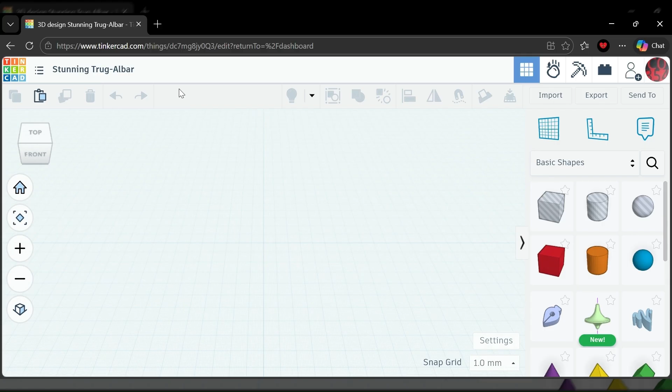So we're just going to go to create, and we're using the web browser version of Tinkercad. We're going to name this vertical spinner bot.

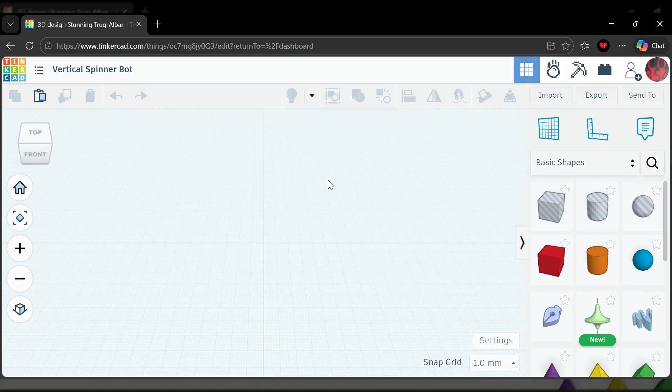The 5 main category bots are vertical spinners, horizontal spinners, drum spinners, full body spinners, and flipper bots. Flipper bots are not really used because it is very hard to make an automatic flipper bot.

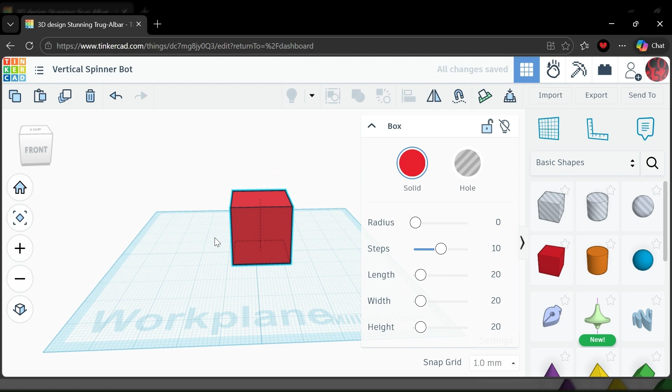The first thing you really need, and this goes for any great version of a bot, is a good solid flat base, especially for vertical, and you want it in a kind of square slash rectangle base. Give it a good solid foundation. Also, unless it's a small body, 4 wheels is best, and today we are going to go with a 4 wheel design.

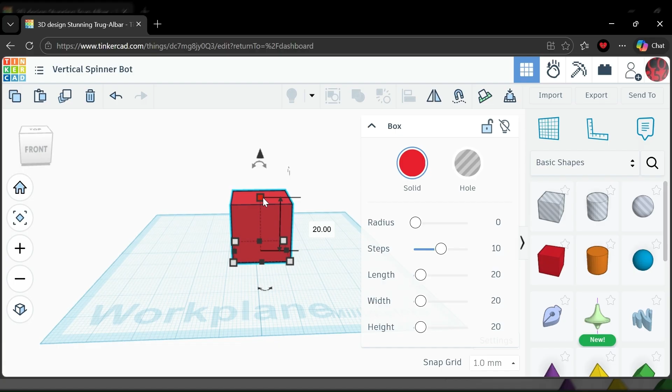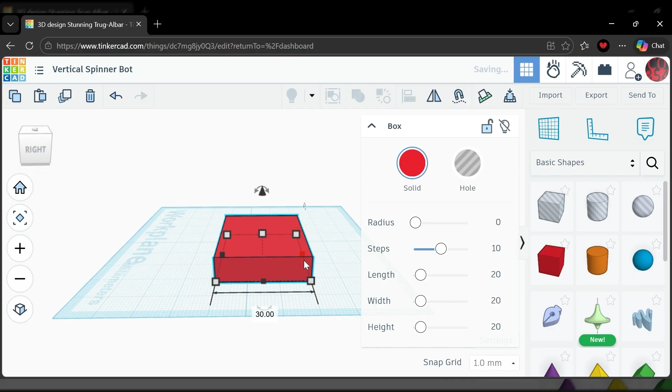So we're going to take the box shape and shrink it down to about 8. Stays good for now. Then we're going to make this about 40 wide by 30. That is a pretty good solid base.

We're not going to worry too much about design right now. This is just a tutorial of the basics.

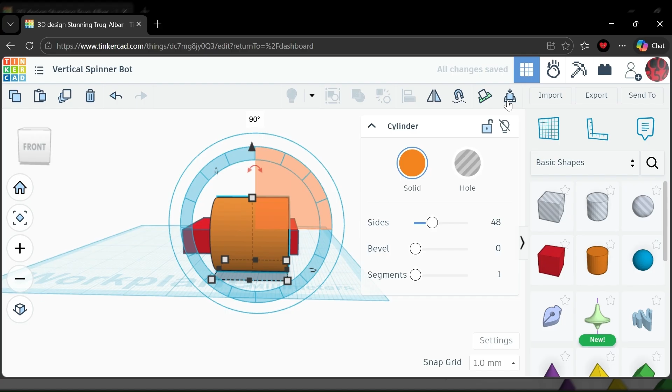For the wheels, you can take your cylinder shape, drag it out here, turn it sideways, and this tool drops it to the floor of the work area. Then change the sides from 48 to 128, and that makes it smooth and makes it grip very well. Then we can change the size of it to 10.

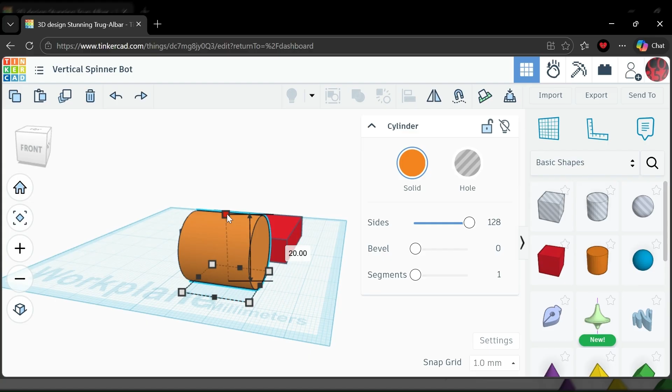Actually, we can undo. The cool trick you can do is, if you're using a keyboard and mouse, which is what I'm doing on my laptop, hold the shift button, click on the anchor, and you can shrink it to about size 10 all around, so it shrinks universally.

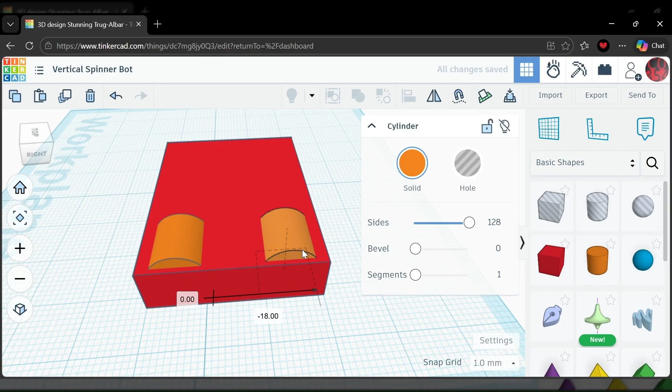Then we're going to bring it over, I'm going to put it about the corner here. Then we're going to duplicate this and move it to the back corner here. We can shift-click to select both of them. Not exactly what I wanted, but that works.

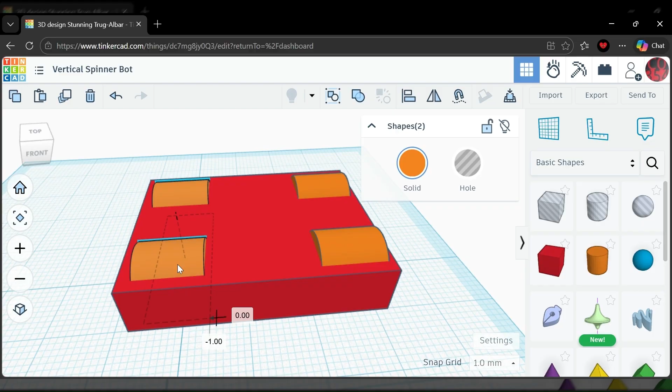You want your tires to have a good equal spread. If it's lopsided, then it's not going to work that well. Then what we can do is pick up the body, that way it's not dragging on the ground.

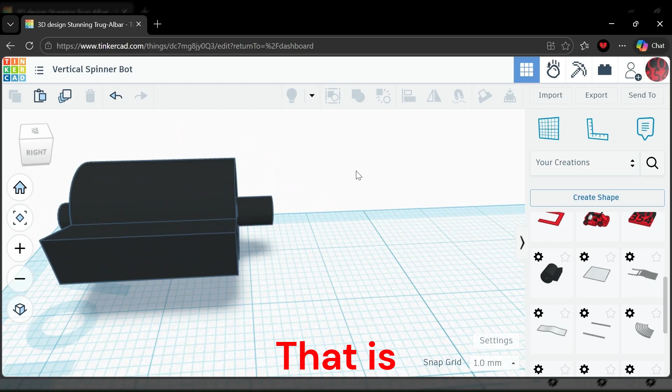A lot of people get drum spinners and vertical spinners mixed up because they both spin in a vertical direction, but a drum spinner is almost a cylindrical shape. It's round in shape, and it's also very wide for more contact area. It's more for chewing into your opponents.

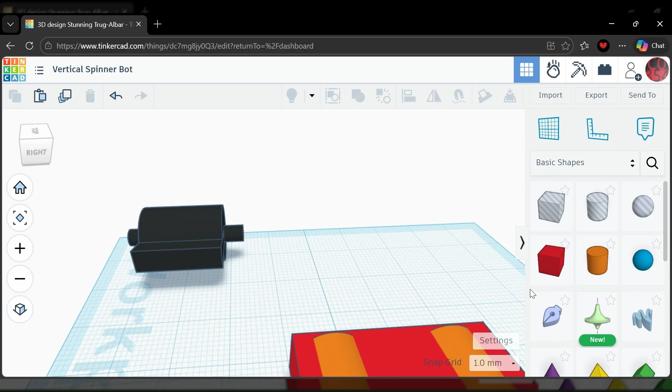Whereas when we make a vertical spinner, it's narrow. There are disc spinner vertical spinners, which is a round shape like a drum spinner, but the biggest difference between vertical and drum spinners is a drum spinner is wide versus a vertical spinner that is narrow and long like this. That is the major difference, in case you all are wondering.

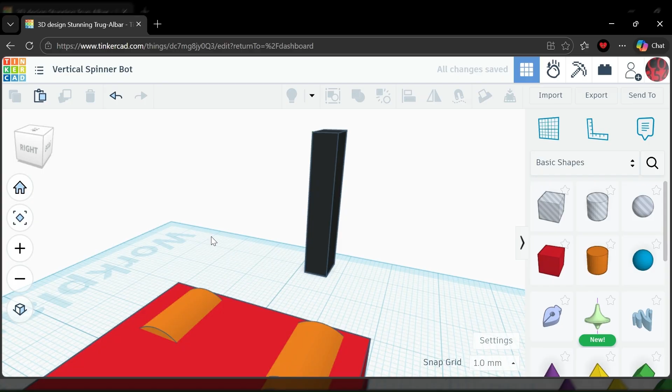We're going to turn this black, I'm going to get rid of that. So when designing a vertical spinner, you want it a bit long and narrow, and that will create a lot of momentum, a lot of kinetic energy, and that will send your opponents flying. Very useful knowledge to have.

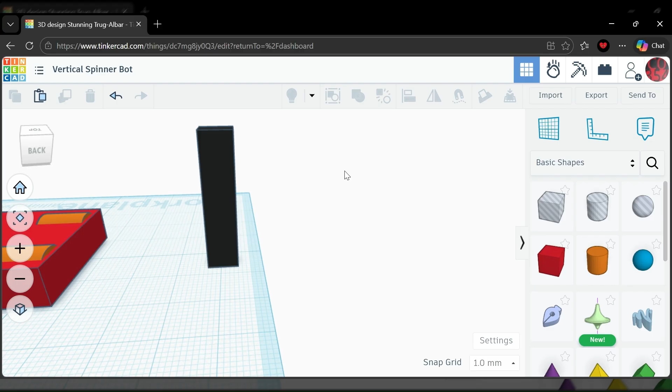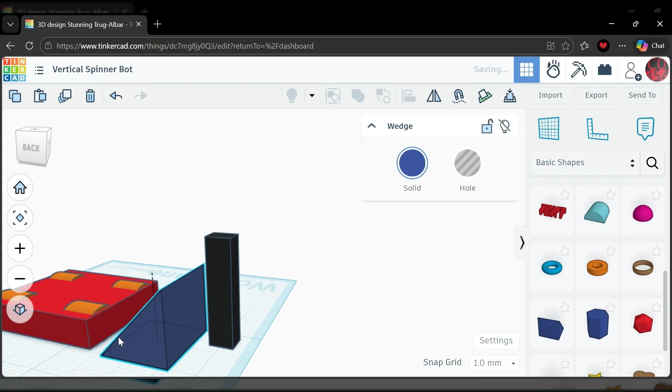You don't want it as just a singular bar, because what you want to have on the bar is like a scoop. So we're going to take the slope or the wedge, and we're going to turn it 90 degrees. Shift-click, and we're going to use the align tool to align it. Yep, there we go.

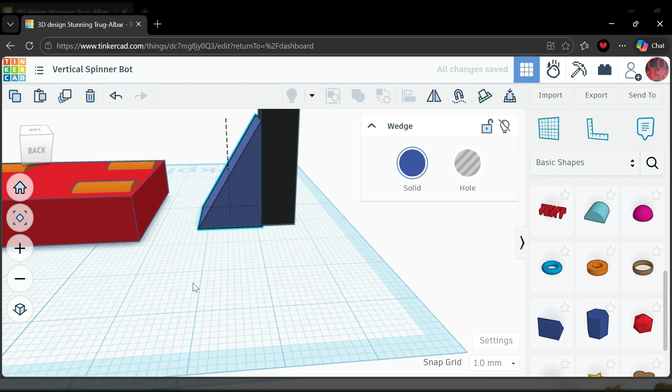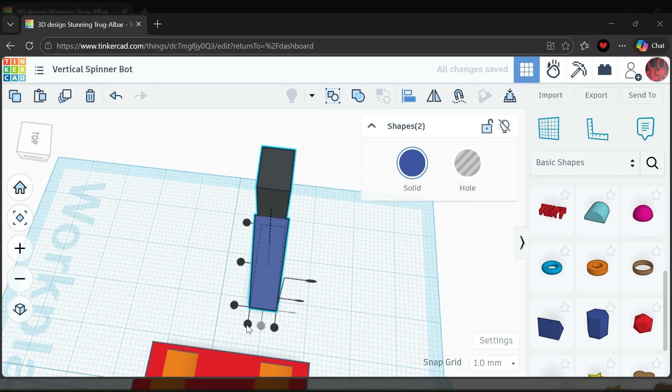We want it to fit the same width, or about the same width, as the bar itself. I'm going to take it and shrink it just a little bit. We can make the bar a bit higher.

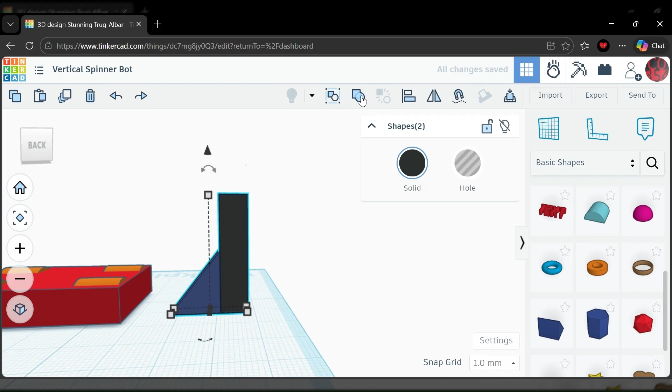Actually, what we can do here is group it, set the group to bundle, that way it's not like a full group. Then we can duplicate it and rotate it.

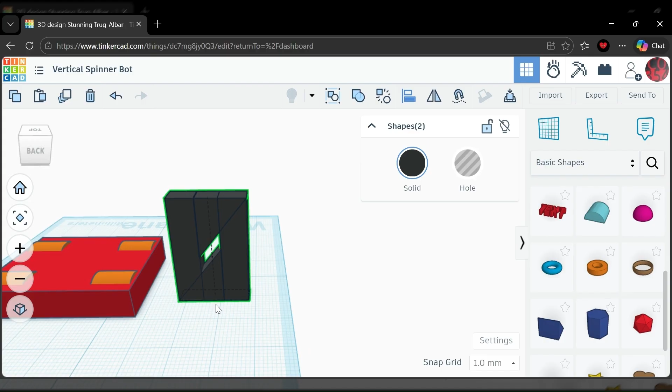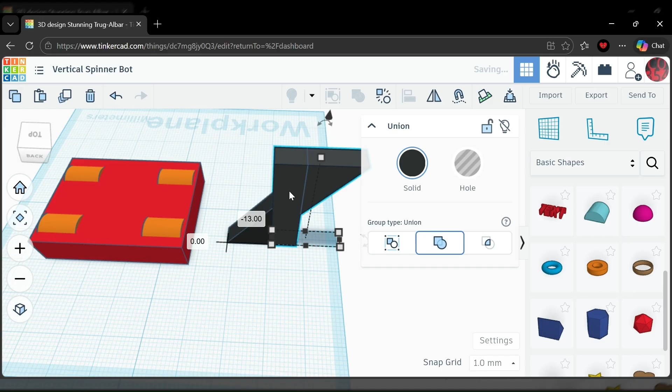Okay, that's interesting. So when you're in a group bundle, you can't align two items. That is very interesting. Oh wait, I see how it's going. Okay, never mind, we're gonna have to do it manually. It's already aligned perfectly, so we're going to align it like that.

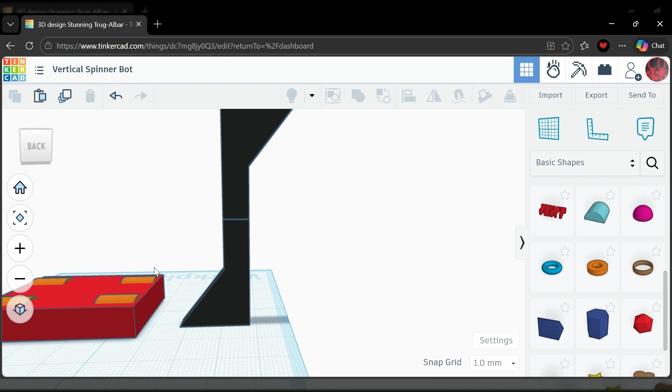So what the wedges do is they help get underneath your opponent, and they will scoop it up and just throw them back. There was one time I had a scoop that kind of curved inwards, and you do not want that because it won't scoop, it will just deflect. What you really want is that scoopage to pick it up and just toss it out of the arena.

Now we can group these together. It's a bit big for a bot right now, so we can go ahead and shrink this a bit. Just like that.

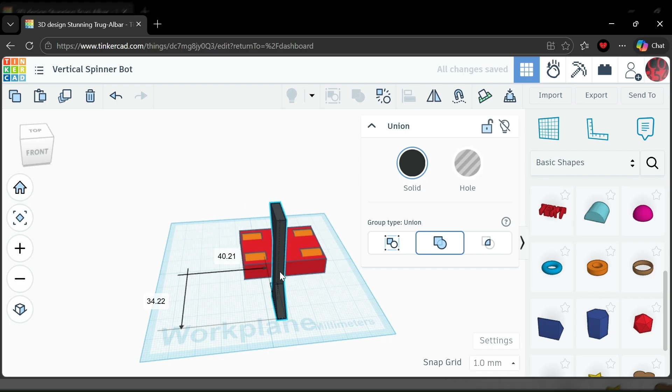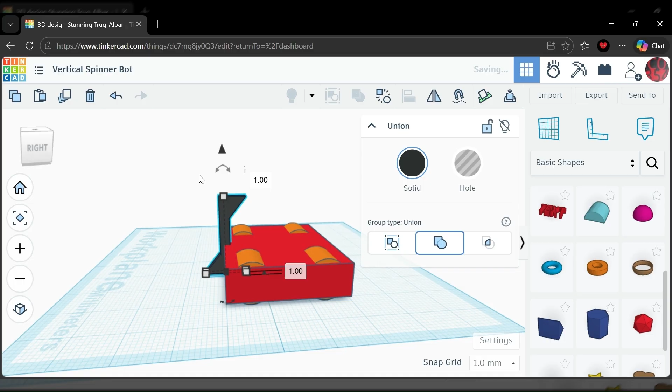Shrink it some more, and bring it up just a little bit, about a millimeter off, so that it's not hitting the ground. Okay, so that is the basic design of our vertical spinner.

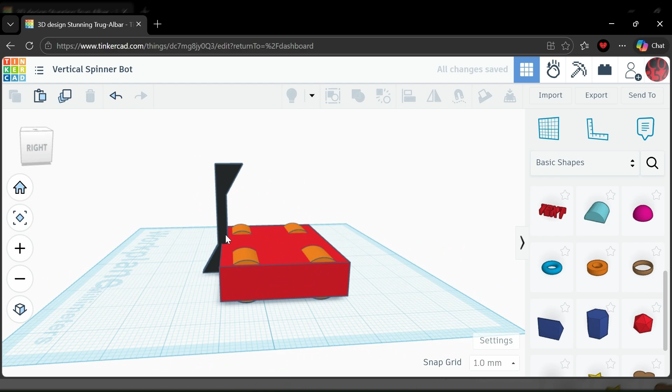Honestly, what we can do is make it a little bit longer. Maybe also right there.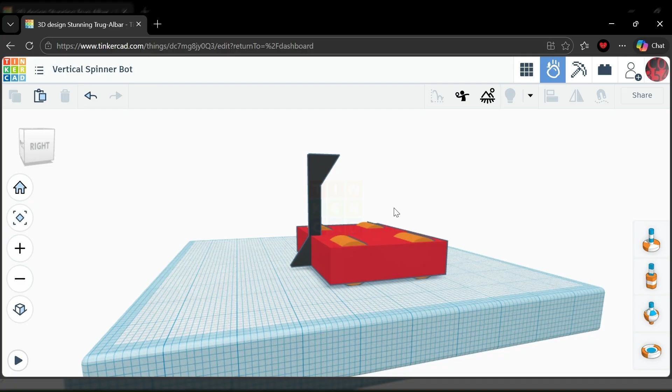Okay, so now we can go to the SimLab option here, which is the falling apple, and we can add the motor connectors, which is a relatively new feature in Tinkercad. What we can do is hide the box, take these motor connectors, and attach them to the wheels.

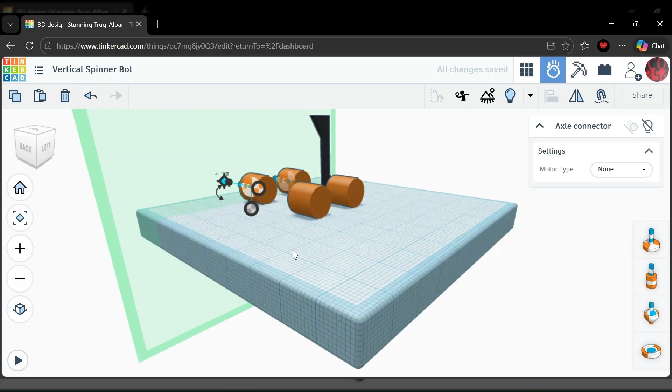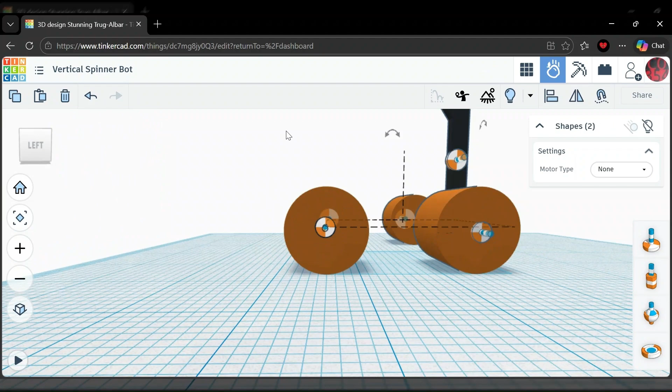Then we can attach it to our spinner. A lot of people don't know this, but if you select all these, you can align them so they are perfectly straight and symmetrical, and you don't have like a galloping horse of a bot.

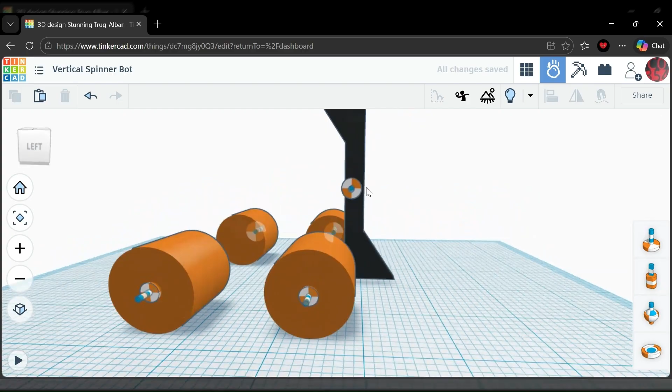So use the align tool, especially for tires and for weapons. It's very important and useful to get knowledge on, otherwise your bot will get chewed up.

Alright, so now we can bring back our box body, and we can connect all these motors to the body.

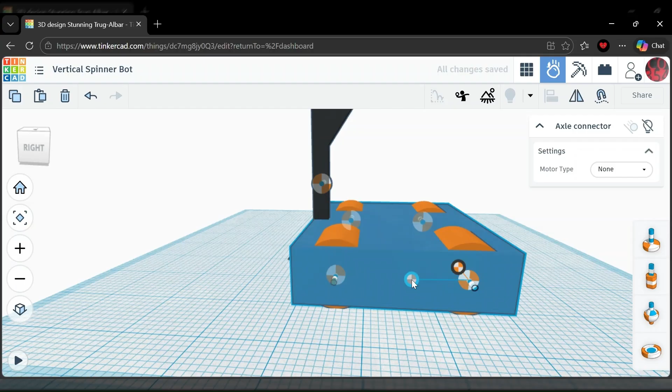Now, the way to set the motor speed is we click the motor that we want, go to motor type, continuous, and we want it full speed.

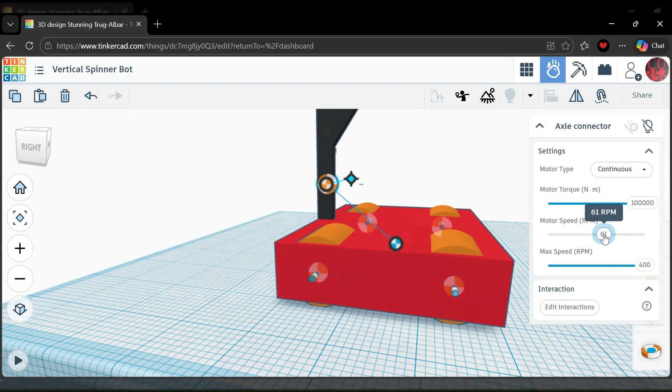You can see the direction that the weapon is spinning, so that's not the way that we want it. We want it going the way that the wedges are pointing. See that there? Now that's spinning in the right direction.

And if we take this and we set it to continuous, it is going in the right direction.

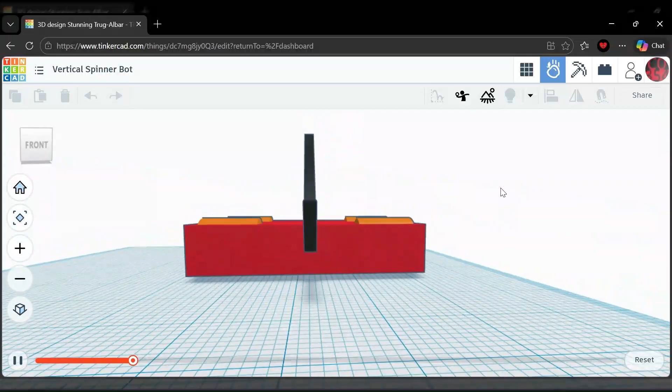And if we throw something at it, it kicks it. It absolutely just punts it straight up into the air. Let me zoom out for you guys to see. See where he just kicks that banana straight up, punts it away, gets rid of it.

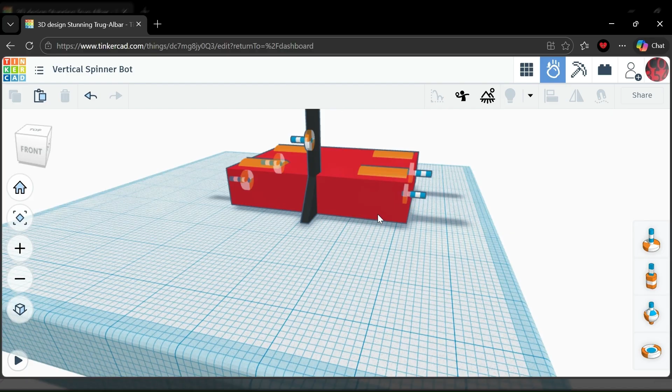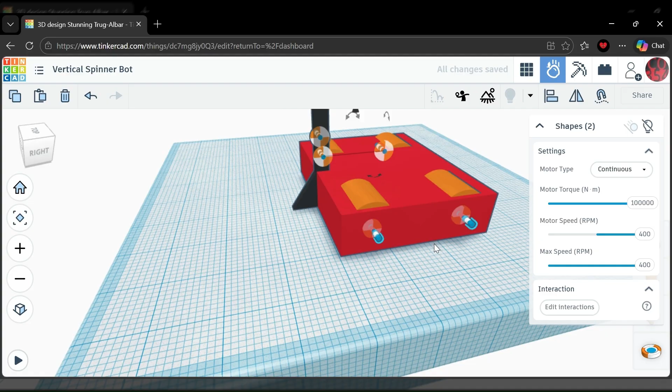Then we can select both these motors because they're going the same way. You select both those motors, and you want these continuous. That'll make it an autonomous robot.

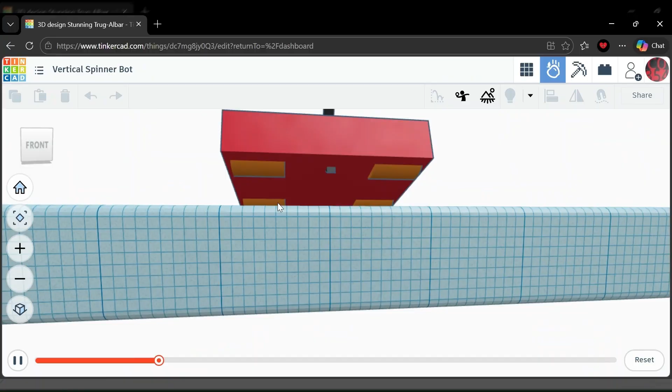Now those are moving. Alright. And then when we set it to dynamic, oh, we got ourselves a problem. Ah, I see what it is. This needs to come up a bit.

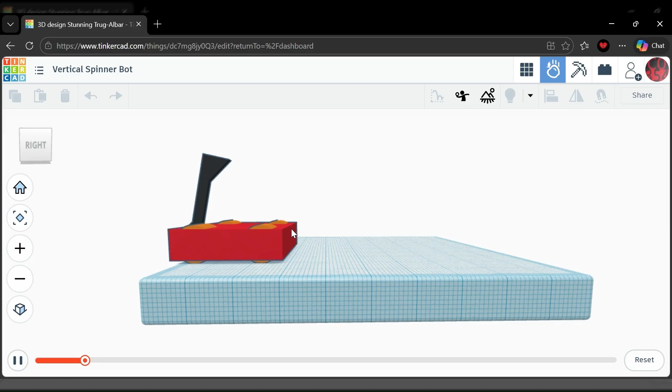That's where you gotta pay attention, where your weapon's at, if you need to move it or lower it. And now look at that. It moves forward, it moves great.

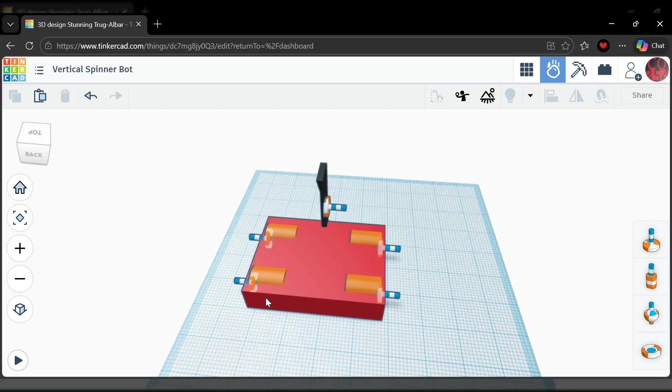So the way to change body material is you start with the bar, select the bar, and you get the material here. You can choose all the materials, and I personally set it myself to make it as even a fighting field as possible for everybody who's competing.

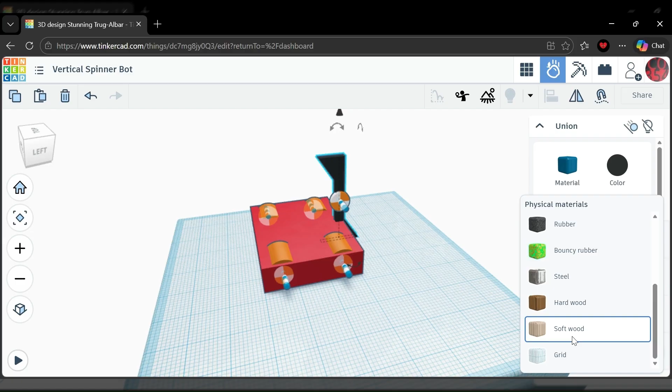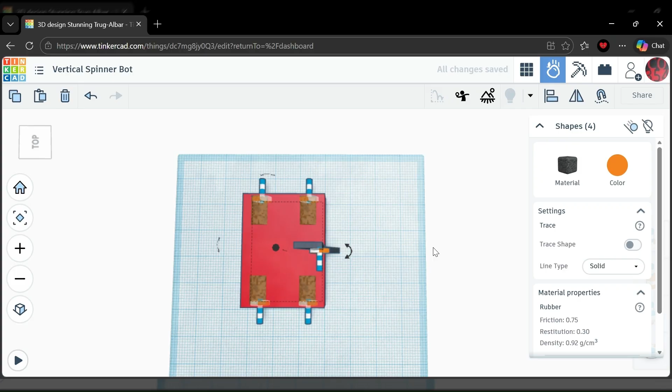So we're going to set it to steel, the weapon to steel, and we're going to shift select all these wheels, and you can either do rubber or bouncy rubber. Bouncy rubber is much faster of a bot, but you do bounce around quite a bit, and then the body will stay plastic.

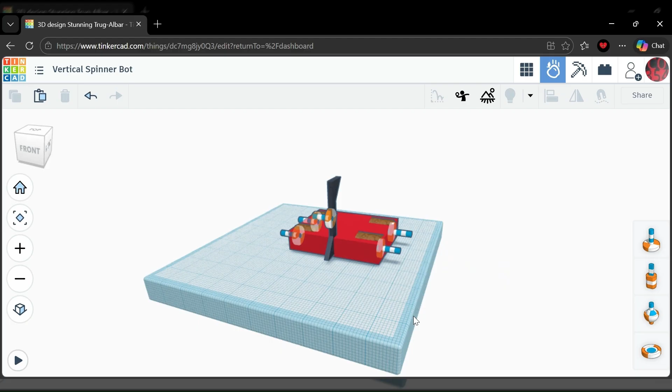Alright, so that is the basic build of a vertical spinner. You guys stick around and we're going to go ahead and make this cooler, give it some more design, make it pop out in shape.

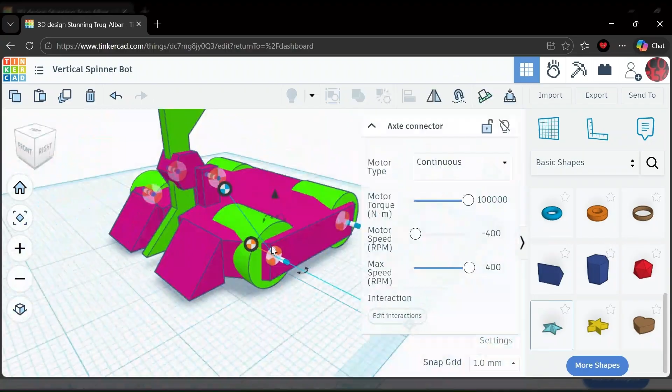Alright guys, so I'm going to go ahead and change this to bouncy rubber, give it a nice little pop in the color. So what I did was I added these wedges here, and that will help you get underneath your opponent's robot.

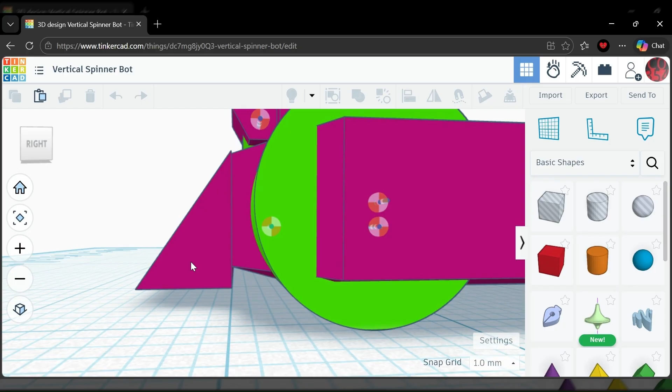One important thing you need to know when you're making a wedge: the way these fights work is a fully autonomous fight. So your bot is going to be moving around by bouncing off the walls of the arena to hit the other opponent.

What you want is, if you see here, you can have the weapon jutting out a bit further than the wedge, and that will help the weapon make contact with the wall. Because if you have the wedge further than the weapon, you're just going to get stuck there and be easy prey for your opponent.

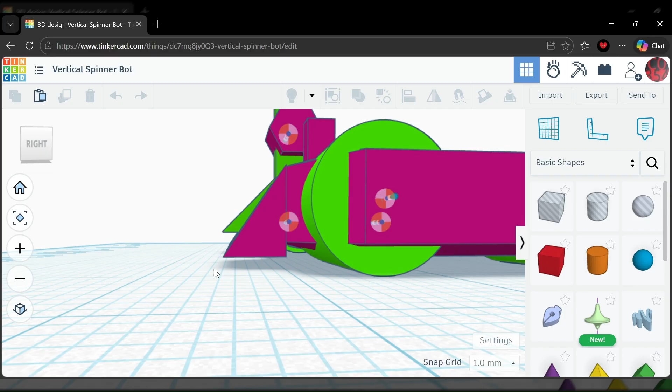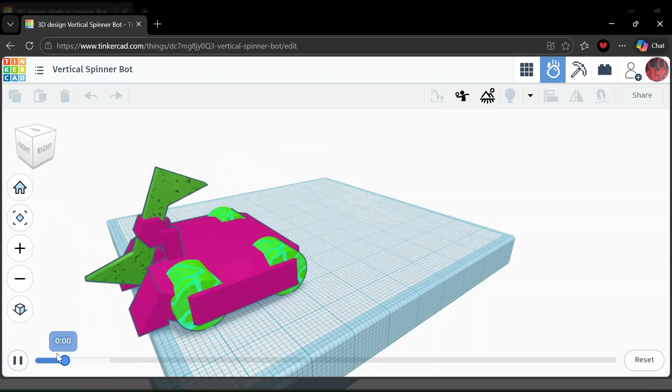So now if we come back here to the sim lab, see, we now got our robot here, very beautiful. And if we hit go, see, it drives perfectly straight. And it's a great weapon for good damage.